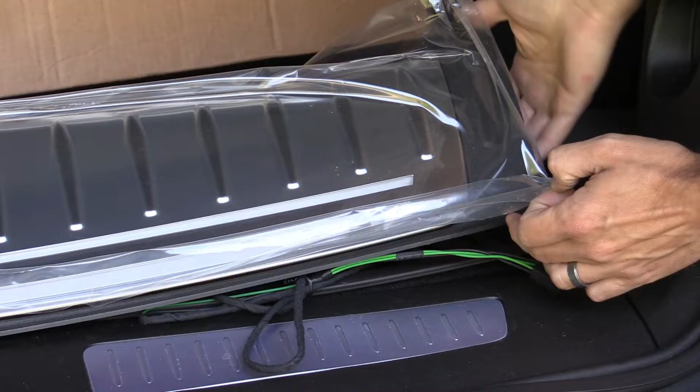So this is the replacement part here, and you can see that the whole plate is metal, and you still got some plastic around the edge. There's a light bar along the bottom, and I guess all of this lights up, and a pretty cool little Cadillac logo over here. We'll just get a closer look here under the plastic. So that's got a really nice look to it.

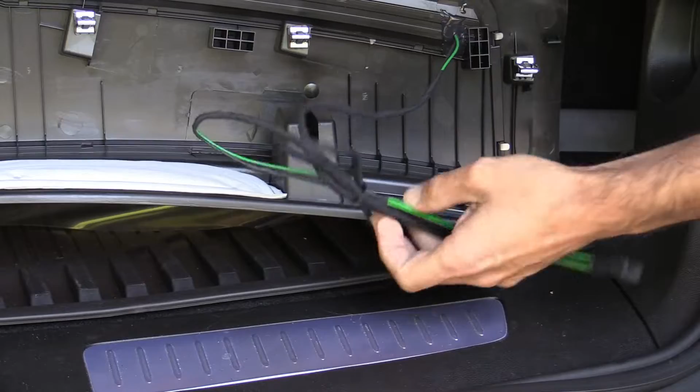And then we've got the bottom here, and there's a wiring harness. Basically the way this is going to work is it's going to tie into one of the lights here in the cargo area. So you'll unplug the light and plug one of these into the light, and then plug the existing harness into there. So basically it'll come on anytime the lights inside the car come on, when you open a door or the hatch. And this is really just clips, it looks like.

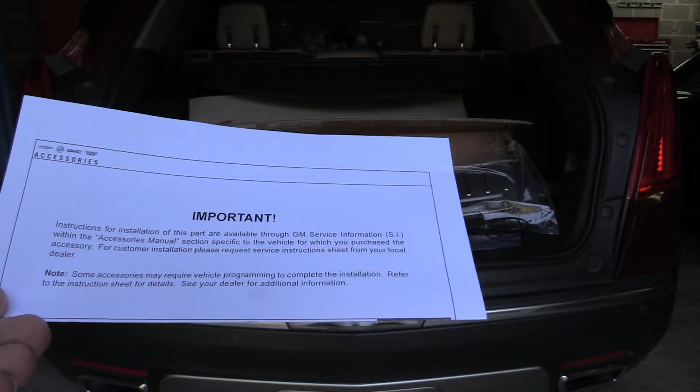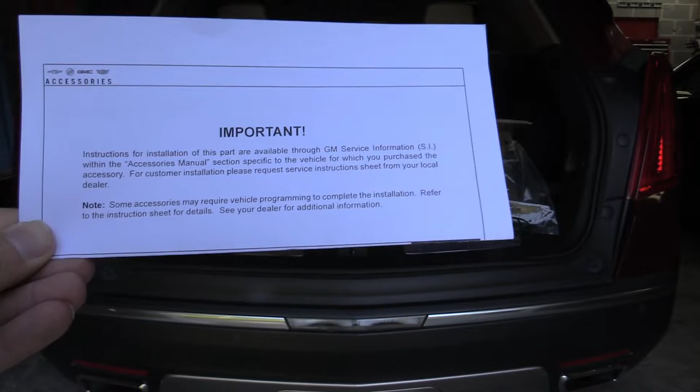But we've got to be able to get to that light, and yeah, it's going to be fun. Part of the challenge here is that this little piece of paper is all that came with the new piece, so no real instructions, just instructions that say go read the instructions. That's always great. I guess they really just intend this to be a dealer installed item, but whatever, we're going to figure it out.

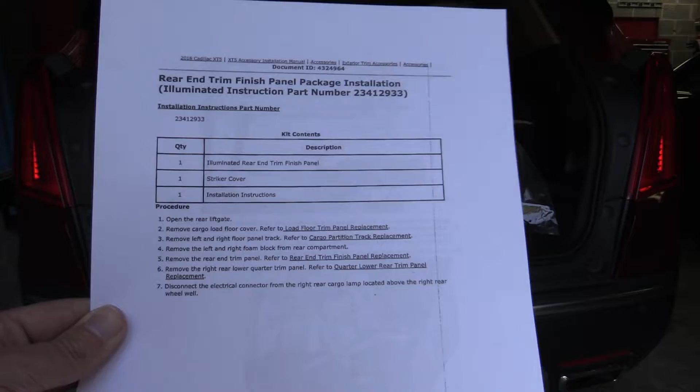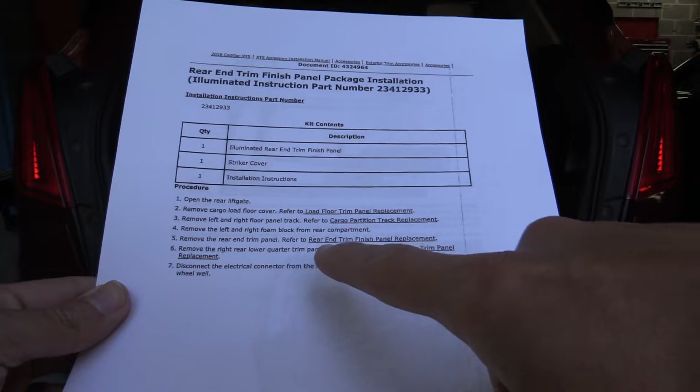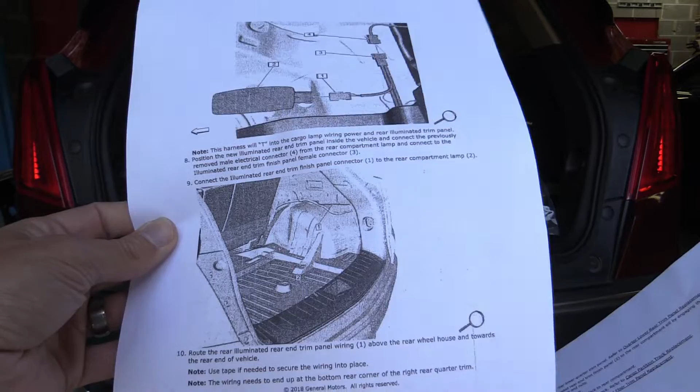So I did go online and do some digging, and I found some instructions that someone had copied. They give us some clues of what to do, but the problem is every step it's like, okay, remove - for example, one of the most challenging parts is going to be removing the rear end trim panel, refer to rear end trim panel replacement. So it's telling us what to do but not how to do it. And we've got some really horrible pictures here. So we're gonna have to kind of figure it out on our own, I think. And that's what this video is going to be all about.

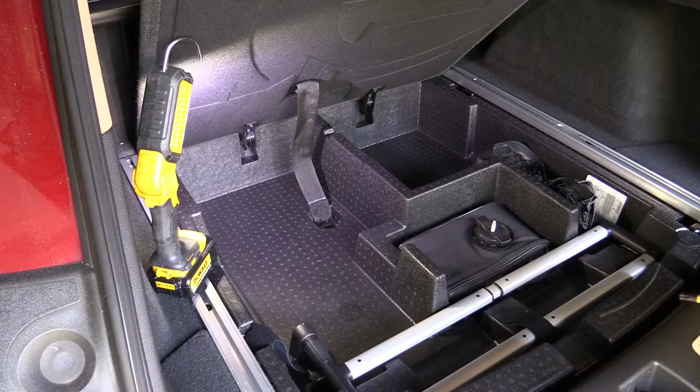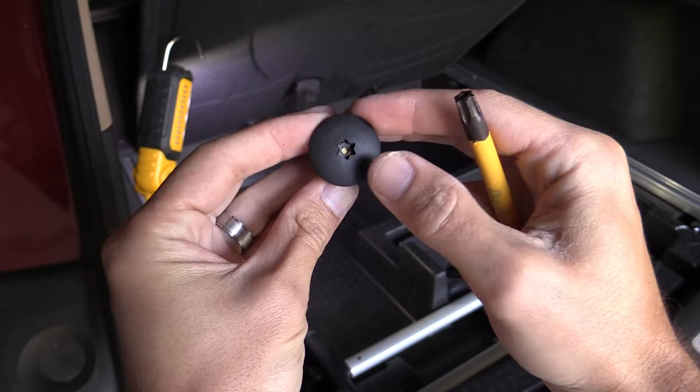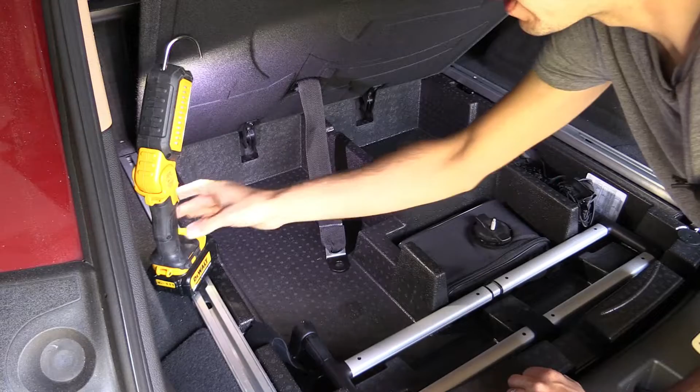But we are going to go ahead and remove it entirely so we can get to everything else easily. So as far as I can tell, the only thing holding this down or keeping us from taking it out is this strap right here, and there is a plastic Torx bolt there, it's a T45. Yeah, so that's just a little plastic retainer with a little metal insert in it. And I believe that now come out. You should be able to lift this out.

The other thing I'm going to do to make our life easier is go ahead and remove this little sunshade thing. That's really simple - you just grasp this raised part on the end, it's spring loaded, pull it in, and then rotate it out.

All right, the next step is to remove the right and left rails here, these silver things. Again, they're held in place with Torx fasteners, one in the front and one in the back.

The reason these have to come out is because there's actually a lip on the back side of this plate, so it wouldn't be able to lift out. These are angled at the back edge, so it should be pretty easy to keep track of which one's the left and which one's the right.

Next it says to remove the left and right foam block rear compartment, which are these little guys here, and I think they're just sitting in there with Velcro. Again, I guess because it rides up over here, I don't know why they need to be removed, but yeah, it just pulls out.

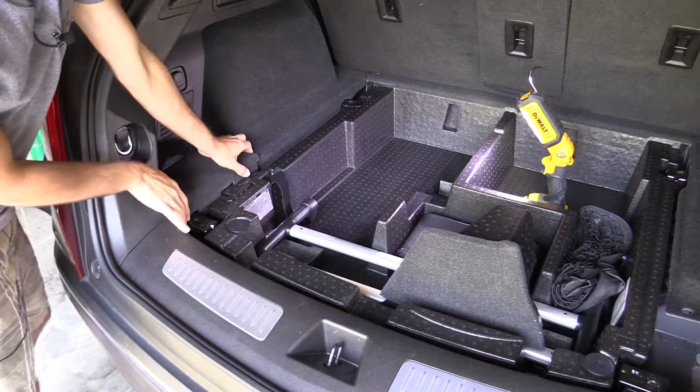And there we go. All right, next up it says to remove the rear end trim panel. So this has to come out next.

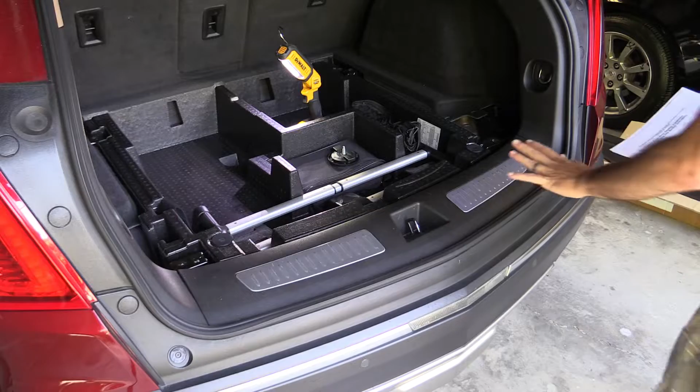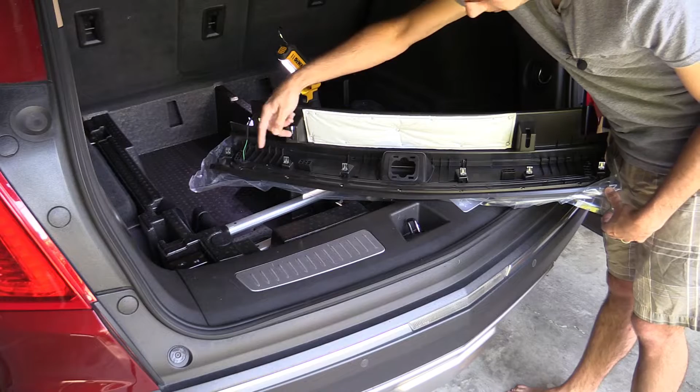No instructions on how to do it, but based off of looking at the other one, there are clips. Let's look at it real quick. So it looks like there are 6 clips through the back, which would imply that it's going to just pull straight up.

There's also a little cover around this lock here. It comes with a new one. I don't know if they're different yet, but it doesn't say anything about having to remove it at this stage, so let's just see what happens.

Normally I don't like to use metal screwdrivers to pry on things, but since we've got a nice rubber edge here, there's nothing really to mar up. And as long as we put the screwdriver up under this lip right here, you're not going to mar up anything that's going to be seen.

You know, this is something I'll probably turn around and resell, make back some money on that thing.

But it looks like those clips are along this front edge. So it looks like that's where we need to start, because I wasn't having any luck on the back edge there.

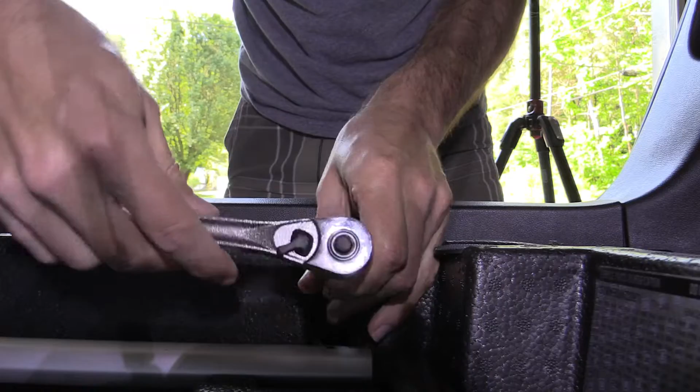All right, there's one. If I'd done that first, it probably would have popped out going by the front. Let's see if it just lifts out now. Bet you it will.

Yep, so there's the old one, and this is an XT5 Platinum, and it does have some metal here. I've noticed on the lowest trim, the base, that this is just all plastic. I don't really see a reason why you couldn't put this on the lower trim, or the really nice one on any of the lower trims. Not sure about that, not positive. But that's out, and that's what that looks like on the back - pretty much the same, minus the light bars and wires and everything.

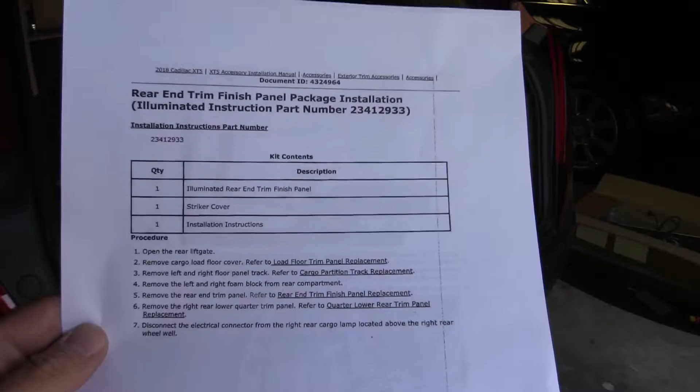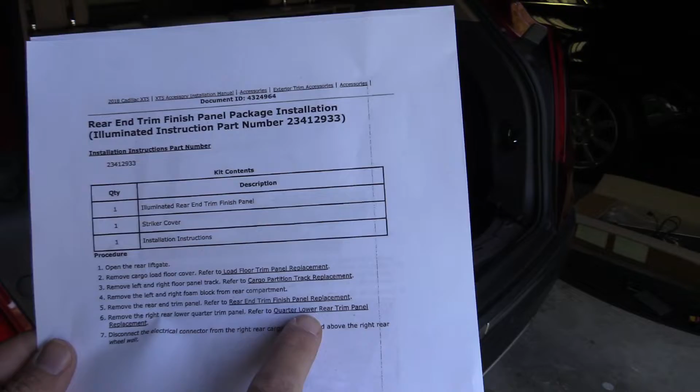All right, so here's where we're going to learn together for sure, because next it says to remove the right rear lower quarter trim panel. Refer to quarter lower rear trim panel replacement, which would be some nice instructions to have, but we don't.

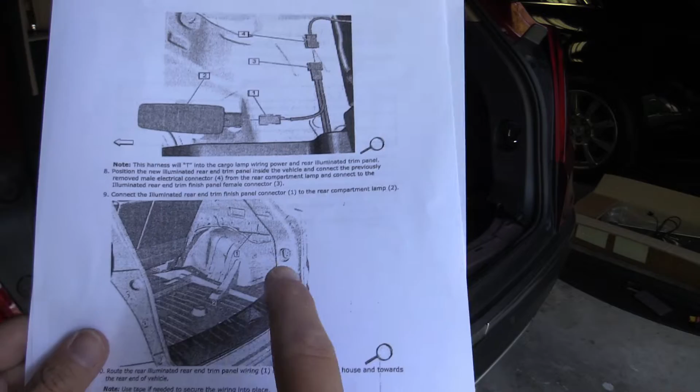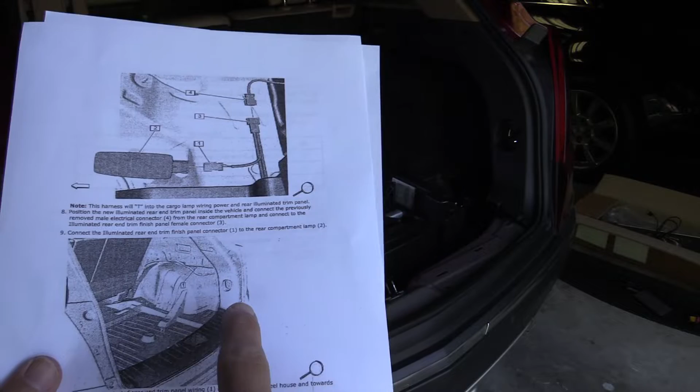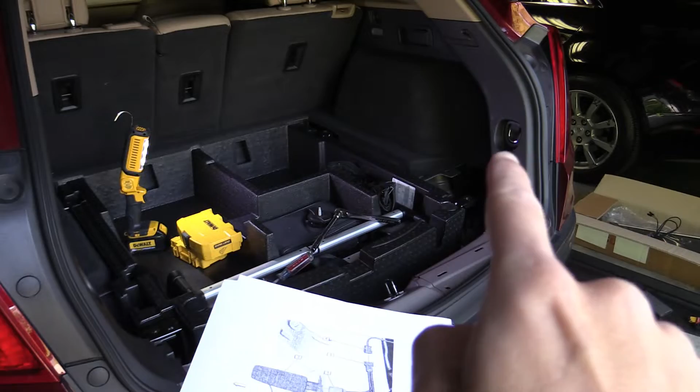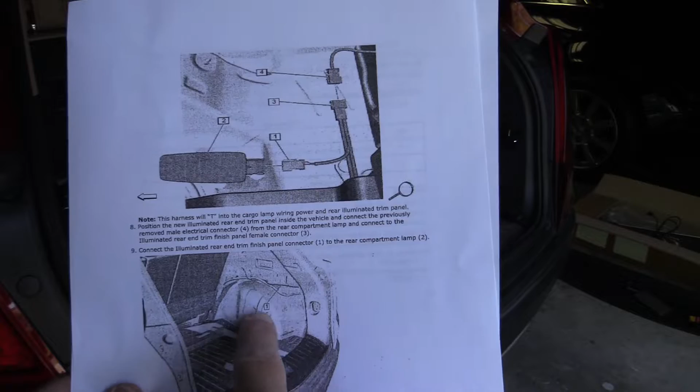The only clues I can look at from this picture is that it appears they did not remove the plastic trim on top. You can still see this hook right here, the track, and this little release thing over here. It almost looks like they just removed this lower part, but I don't know.

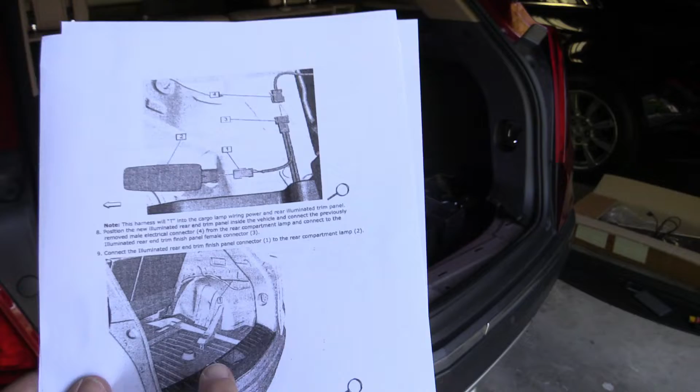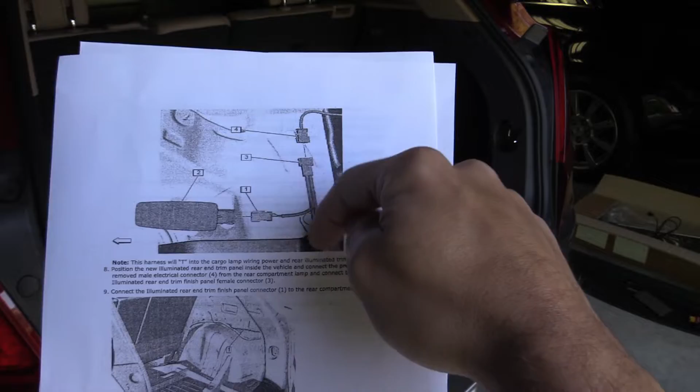What we're trying to get to is this light right here, so you'd still have to get to that light. Then here they're showing the back of where that light's mounted, and it looks like the wiring's going up under another panel, almost as if they didn't remove all of it.

So this is where we're gonna go on a little bit of an adventure, because I'm really not sure. The only things I know offhand, from dealing with other stuff, is this panel overlaps this panel, and there's a bolt here, and I think there's a bolt here, and another one up top over there.

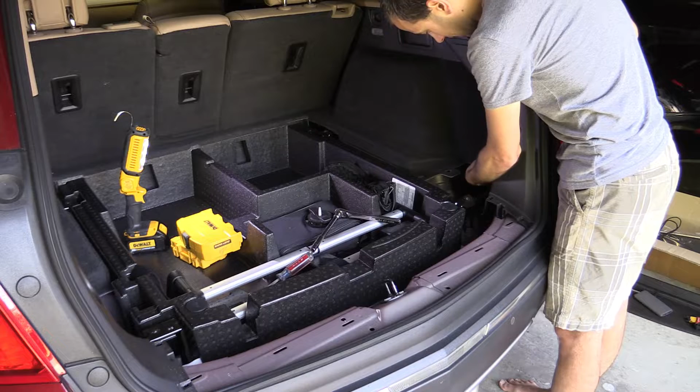This panel here, this carpet part, is really part of this bottom panel here. So I just don't see how you're going to do it without at least pulling this top piece off, because this top piece overlaps the bottom.

So let's see if we can get this top piece off. I'm going to fold the seats down. The only other fastener I know is way back in the front underneath a little panel, which I'll show you here in a minute. If we could reach down in here with just this off, we might not have to take all this off, but it might be more work to fight it.

I think this is all clips through here, but before we start going crazy, right up there is a little panel, which I'm guessing means there's a little screw, probably a 10 millimeter. Well, that actually looks a lot smaller than a 10 millimeter. All right, that seems to be a 7 millimeter.

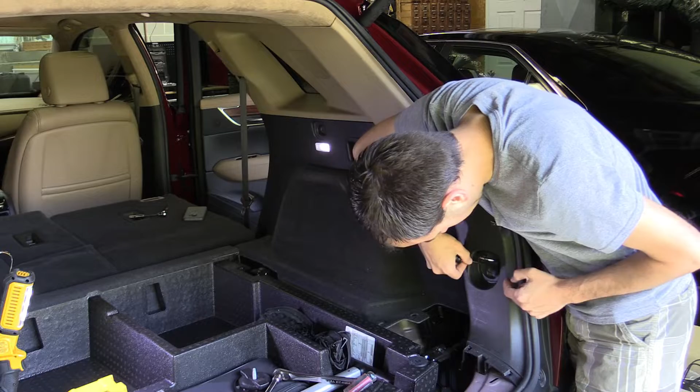Yeah, these are really acting like they need to come off together. So I think there's a bolt. Yeah, and this is some kind of big torx. All right, this is a T45, just like that fastener on the floor was.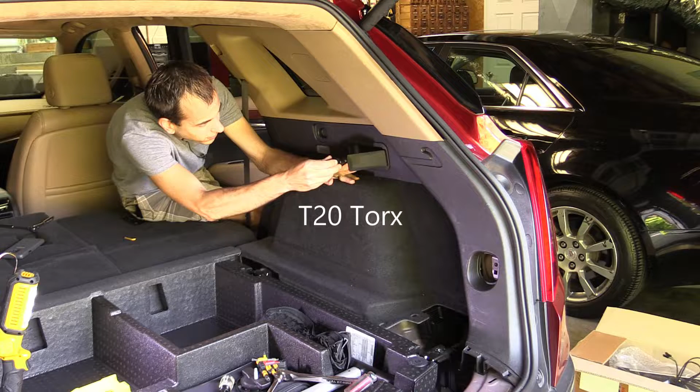You know, had they had 12 volts down here for this light, this would have been too easy. All right, so that's how that comes off. I think there's going to probably be one right there as well. Yeah, teeny tiny torx. I did have a driver for a T20, and that's in there real good.

All right, let's see where we're at now. All right, these do come apart.

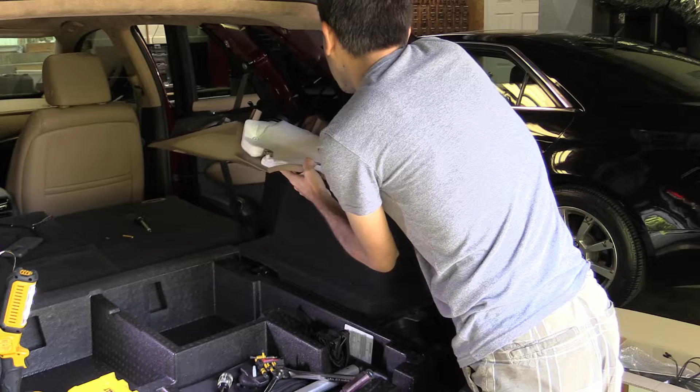Let's go ahead and disconnect the speaker. Now we're just going to slide that over there because I don't want them fouled with the seat belt. So there's a bunch of these little plastic things, or at least one there, and a couple there, that slid into these openings here.

So once you get the bottom unclipped and kind of pull, you want to pull down, and they slide out of those. I think probably the easiest thing to do, once we're ready to put this together, is to pop those out and then lock them in, because I don't know if it might be able to. I'll try lining it up and seeing if it'll slide in there. I'm not really sure what the appropriate way to do it is because they don't want to tell us.

All right, so now we can get to this light. So I might have taken all that off for nothing. So I guess the question is, can we fish something through here and connect to that light without pulling this off? Or should we just pull this off? How hard would it be just to pull this off at this point?

Maybe we should just pull it off. All right, that pops off.

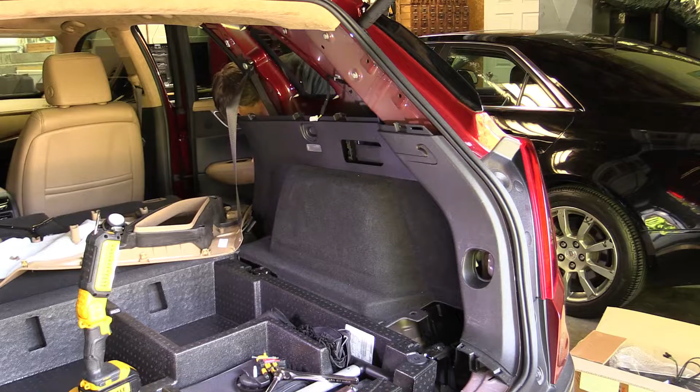All right, so not sure it was really worth it to loosen that up. Might have been able to do it without it, but at this point we really should have enough wiggle room to unplug that light and route the cable. Might have been able to do it the other way, but this panel is kind of hooked up under the seat and under the bin and everything. Sure, there's a right or wrong way to do this, and I haven't figured it out yet, but I think we're close enough now. Get the light out of there.

So I probably could have reached behind there, but there's the connector so you guys can see what that looks like. And we got hopefully plenty of cable here. I'm just trying to route it in such a way that it won't get pinched on anything.

So we've got like a male and a female version of this light plug here. We'll plug the female plug from the new sill plate into the existing harness that was for the light, and that just plugs in like that. And then we'll plug the light back into this.

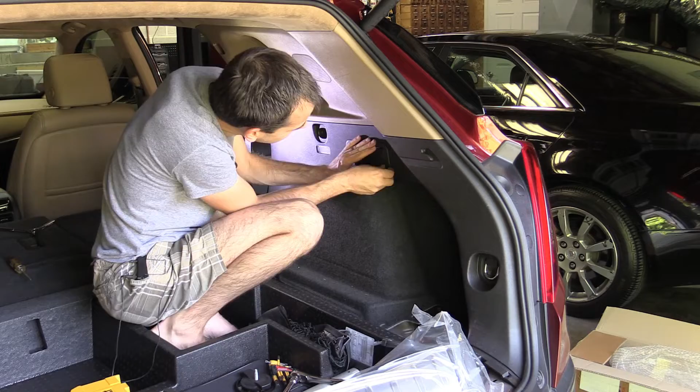All right, finally got all this put back together, and yeah, I would say that it's not really worth trying to pull this lower part down. My recommendation would be just pop this off, reach down in here, pop that light out, unplug it, use a stiff piece of wire or something. I mean, you should be able to almost reach down through there and fish the wire through.

Because this little piece of trim right here is just a pain to get out and get back in, and it's just not worth it. So yeah, I wasted a lot of time there, but hopefully you won't. So let's get this new trim panel popped in and get the rest of it put back together. I'm just going to carefully tuck that wire down in this spot.

And what I would do is look under this edge and get these little posts and clips lined up, and be careful. This wire over here right now is wanting to ride underneath that clip, so make sure it's pushed out of the way and free of anywhere that it's gonna get hung by a clip or the bolt. So I'm just double checking that. I think we're good.

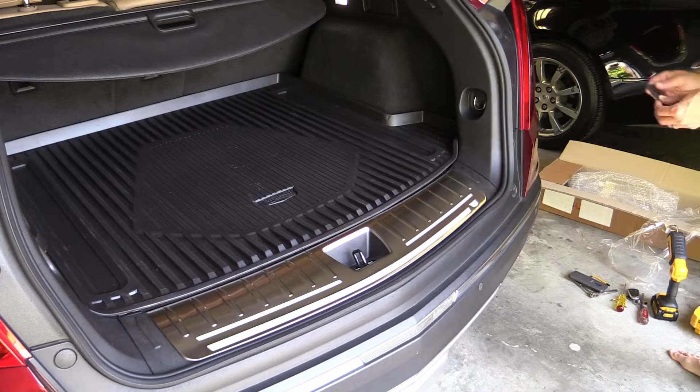And this should just snap in here. And it looks like it's the same on both sides maybe, so I don't think there's a right or wrong way to put it in. Either that or I got it on the first try. Hard to say. But that's it.